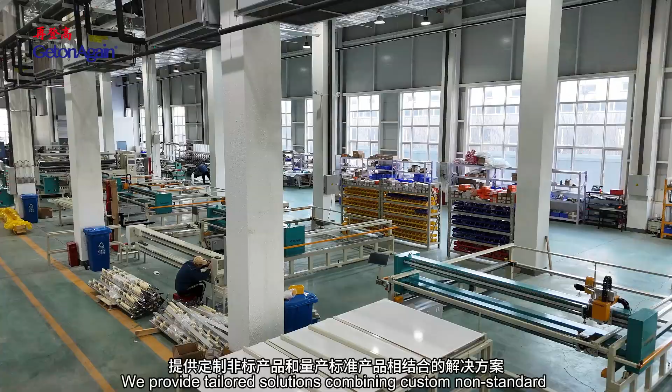We provide tailored solutions combining custom non-standard products with mass-produced standard products, including mechatronic machines, automated production lines, and intelligent factory solutions.

Pattern room equipment includes the magic inkjet plotter: 2 cartridge version with maximum printing speed of 110 square meters per hour, and 4 cartridge version with maximum printing speed of 200 square meters per hour.

Vertical inkjet cutting plotter, one machine with multiple functions: pattern drawing with cutting, or standalone drawing. High-quality rotary cutting knife can cut minimum 80 grams per square meter paper for sample design, cost saving.

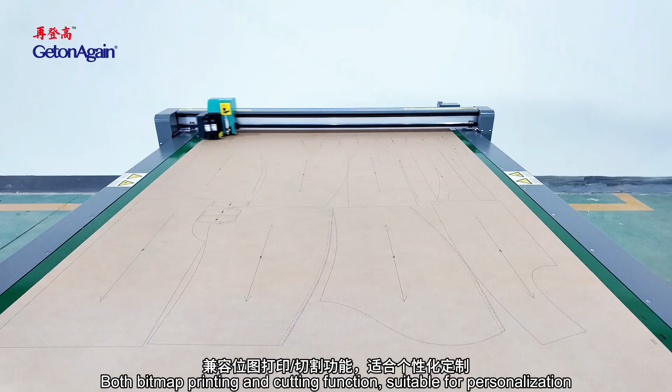Flatbed inkjet cutting plotter, both bitmap printing and cutting function, suitable for personalization, configured with long knife or short knife, and optional fixed knife sleeve or elastic knife sleeve, suitable for cutting various materials.

Digitizer, easily reading paper patterns, convenient positioning, simple operation, accurately reading patterns, enabling faster design. It is a powerful tool for traditional manual drawing digitization.

Digitizer can be used in various fields, such as clothing industry, fashion design, surveying and mapping, mining, stamping, and environmental protection, etc. Flatbed scanning digitizer.

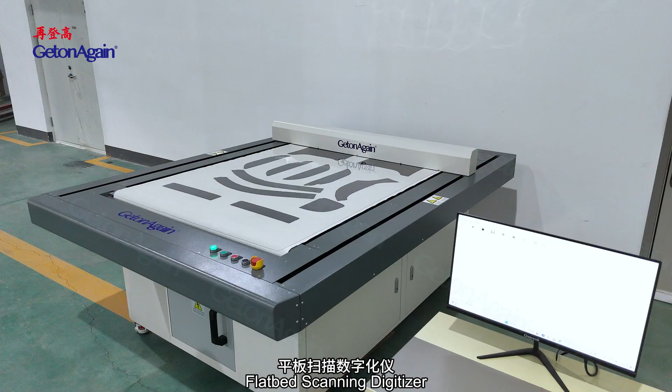One button to start after placing scanning pieces. Can vacuum adsorption auto scanning, auto transmission. According to different models, supports ultra-long width scanning. Scanning speed up to 7,200 mm per minute, scanning resolution 150 to 300 dpi. High definition panoramic 1:1 image ensures effective identification of various contours, notches, and inner holes.

Cutting equipment includes the automatic spreading machine. Easily set the spreading method, length, speed, quantity and sections, with intuitive as well as simple operation. Dual use for both knit and woven fabrics, suitable for t-shirts, children's clothing, loungewear, and toy textiles.

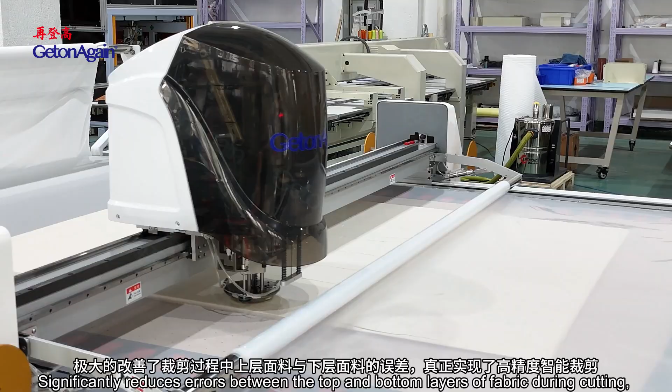Automatic multi-layer cutting machine. Through the combination of micron-level intelligent sensing components and an intelligent control system, dynamic compensation and correction of cutter deformation during cutting operations are achieved, significantly reducing errors between the top and bottom layers of fabric during cutting, enabling truly high-precision intelligent cutting.

Automatic single-layer cutting machine. No need to create specialized cutting molds. Cutting can be performed precisely by directly importing CAD design drawings into the equipment. Optimizes cutting paths, integrates repeated cutting lines, allows for pre-simulation of the cutting process, and supports continuous cutting for extra-long materials.

Stripe and plaid matching cutting machine, equipped with a few HD industrial cameras, according to the capture size to perform intelligent combination, ensuring high accuracy fabric image capturing.

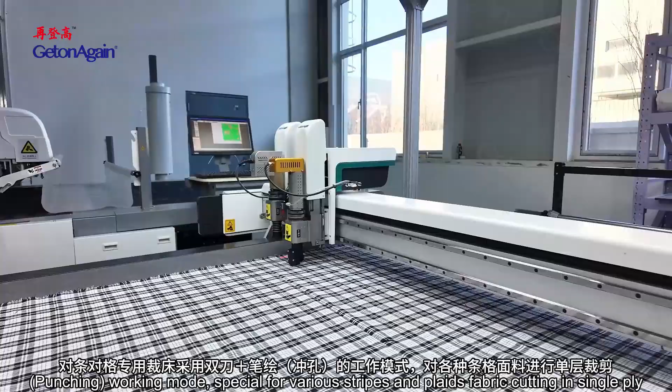Stripe and plaid matching auto cutter, equipped with double knives and pen draw punching working mode, special for various stripes and plaids fabric cutting in single ply.

High-end clothing customization: the effect of the alignment match stripe and plaid process has become an important measurement of the quality of this type of clothing. Stripe and plaid auto cutter is the equipment specially developed for this process to meet matching stripe and plaid clothing, suitable for single ply cutting.

Process of striped plaided fabrics. Precision single head cap and tubular embroidery machine. Pattern rotation and proportional scaling.

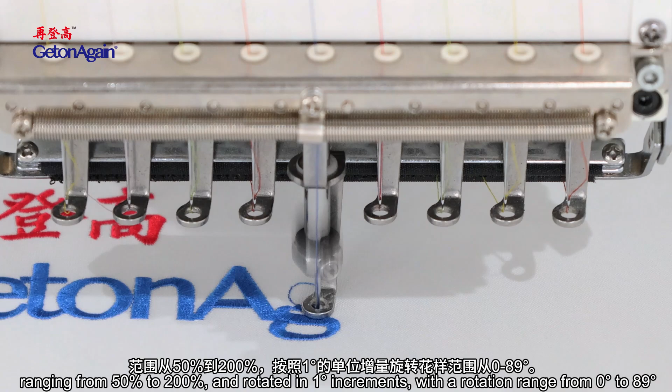Patterns can be scaled up or down in 1% increments, ranging from 50% to 200%, and rotated in 1 degree increments, with a rotation range from 0 degrees to 89 degrees.

Precision two-heads cap and tubular embroidery machine, equipped with automatic color changing, automatic thread trimming by motor, servo motor thread hooking, and automatic thread break detection.

6-head flat embroidery machine, used for high-end customization of clothing, bags, shoes, hats, toys, and other products.

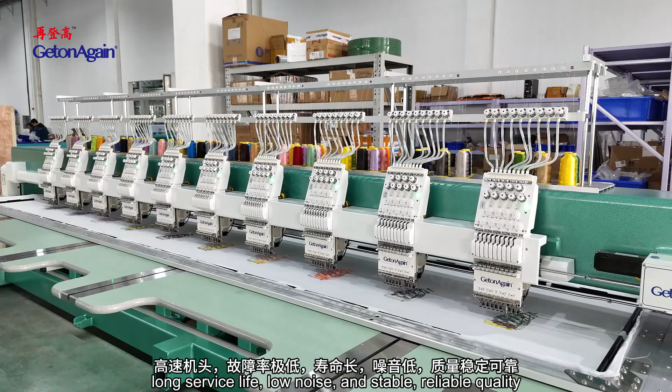Computerized embroidery machine. High-speed embroidery with extremely low failure rates, long service life, low noise, and stable, reliable quality. Equipped with an upper thread clamping device to prevent thread detachment and breakage, ensuring excellent embroidery results. Suitable for textile and garment manufacturing, footwear, hats, bags, home decoration, automotive interiors, and industrial products area.

Embroidery equipment includes the Cloud Smart Teaching Embroidery Machine, suitable for integrated theoretical and practical teaching of computer embroidery in fields such as fashion and apparel design, clothing design and its engineering. Mixed chenille chain stitch embroidery machine.

Mixed embroidery feature: according to color sequence settings, switchable between chenille embroidery and flat embroidery, simplified operation. Chenille needle height can be adjusted across 10 levels according to chenille pile height or chain stitch thread thickness. Multifunctional embroidery on garment, shoes, caps, home textile, toys, bags and luggage, art thread, etc.

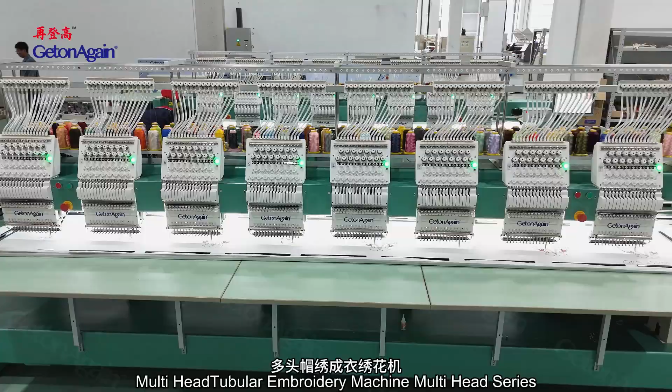Multi-head tubular embroidery machine, multi-head series, suitable for embroidering on flat, caps, garments, shoes, belts, bags, etc. Auto thread trimmers, auto color change, auto thread break detection, 270 degree wide angle cap system, red light locating, LED lighting, precise head and drive system to ensure exquisite embroidery work.

Drop tables, easy to lift up and down. Multiple heads greatly improve work efficiency, suitable for embroidery shops and factories of a certain scale.

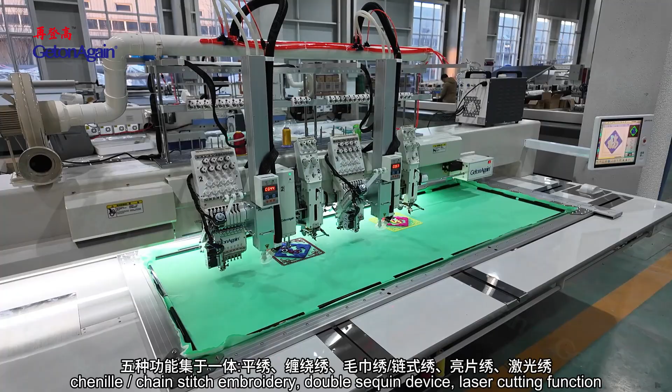Computerized 5-in-1 embroidery machine, integrating 5 functions in one machine: flat embroidery, coiling, tape cording embroidery, chenille and chain stitch embroidery, double sequin device, and laser cutting function. High precision, strong stereo sense, ideal artistic effect, suitable for embroidery of apparel, home textile, furniture, teaching, design and arts and crafts, etc.

Computerized mixed embroidery machine, multifunctional integration: flat embroidery, cording embroidery, chenille, chain stitch embroidery, sequin embroidery, and laser embroidery. Expandable options support additional modules such as laser process. Fast switching between flat embroidery, cording embroidery, or chenille embroidery, allowing you to choose any embroidery type as needed. Applications: suitable for embroidery on garments, home textiles, home decor, education areas, R&D, and arts and crafts products.

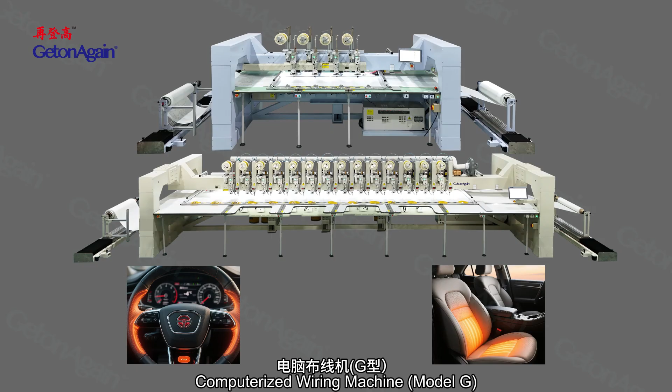Computerized wiring machine Model G. Gantry frame design ensures easy material loading, unloading, and maintains material flatness during wiring.

Large spool device reduces heating wire replacement frequency during production. Automatic wire feeding device for resistance wire or other wires, with adjustable feed amount and feed fault alarms.

Automatic product changeover. Raw fabric feeds in from one end. After wiring, automatic take-up device pulls material with adjustable length, reducing manual pulling time and labor.

Pneumatic frame with program-controlled pneumatic components for automatic opening, closing, and tensioning. Firm clamping with adjustable stretching lengths within a specified range.

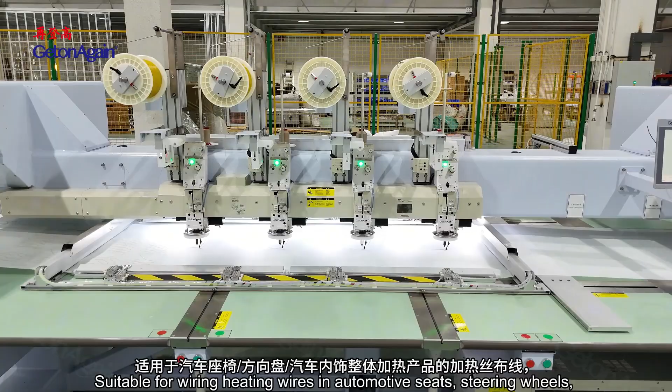Suitable for wiring heating wires in automotive seats, steering wheels, and complete interior heating products. Also applicable for automotive hands-off detection HOD product wiring.

Carbon fiber placement stitching machine. Suitable for the layup and stitching of carbon fiber materials in industries such as automotive, aerospace, and bicycle manufacturing. Enables precise features and independent feeding paths for carbon fiber, significantly reducing fiber abrasion and ensuring material integrity.

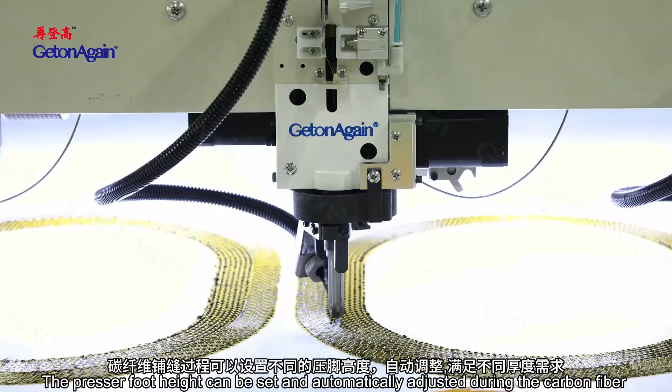Enables highly accurate stitching of carbon fiber fabrics. Stitch width can be set according to different material specifications. The presser foot height can be set and automatically adjusted during the carbon fiber placement and stitching process to accommodate different material thicknesses.

Tufting series equipment includes computerized tufting machines with a rotary tufting head at any angle, avoiding positive-negative stitching difference, with higher efficiency and better tufting result. Suitable for various rugs, carpets, hanging carpet, tapestry, and other flooring, decorative, and home furnishing products tufting.

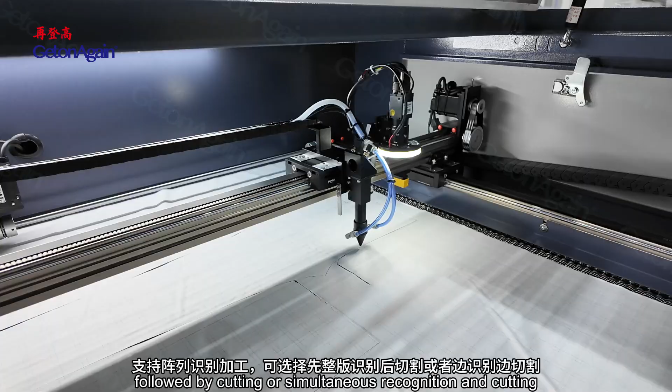Laser equipment includes small format camera positioning laser engraver cutting machine, supporting array recognition processing, with options for full sheet recognition followed by cutting or simultaneous recognition and cutting. Features multi-template mixed cutting, allowing the recognition and positioning of different patterns to be completed in a single operation.

Laser engraving and cutting machine. The cutting center can directly and seamlessly interface with software such as AutoCAD, CorelDRAW, AI, and Garment CAD, ensuring easy operation, high cutting precision, and fast cutting speed.

Suitable for clothing, home textiles, furniture, luggage, toys, car interiors, shoemaking, and other industries for cutting and carving of non-metallic materials.

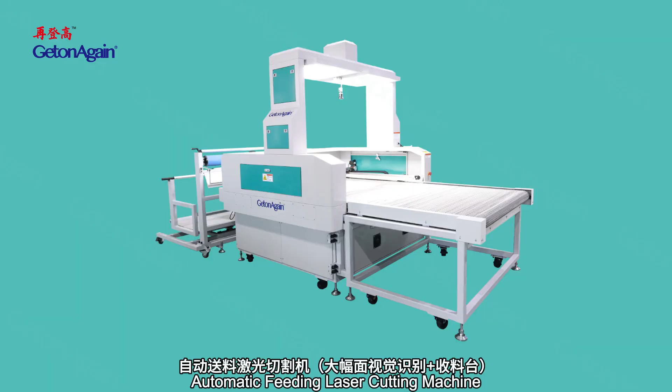Automatic feeding laser cutting machine, large format vision recognition plus auto receiving table. Advanced vision system with high resolution industrial camera captures real-time images of material patterns, accurately detecting outer contours to perform precise cuts, resolving issues such as distortion in printed or stretched fabrics.

Choose the most suitable positioning mode for different pattern types to optimize cutting accuracy and efficiency. Supports edge alignment and tension control to ensure smooth, wrinkle-free material feeding.

Highly automated, ideal for continuous production. Designed for precise, high-efficiency cutting of flexible materials such as digitally printed fabrics, lace with pattern alignment and shaping cutting, and heating elements with positioning requirements.

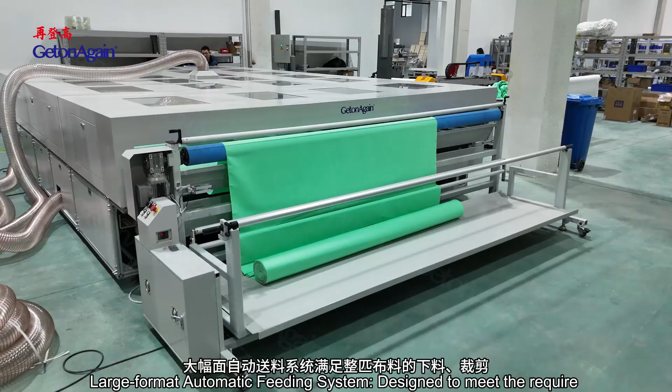Fully automatic large format laser cutting machine with inkjet device. Large format automatic feeding system designed to meet the requirements for feeding and cutting whole rolls of fabric. Inkjet and cutting functions integrated for enhanced versatility.

Applicable to industries such as custom clothing, single-piece cutting, sofas, toys, footwear and headwear, textile print pattern positioning cutting, automotive interiors, industrial filtration, and advertising, etc.

Sewing equipment includes automatic arbitrary rotary single-needle leather sewing machine, suitable for automated leather pattern sewing in the fields of automotive interiors, car seat covers, car door panels, airplane seats, and leather furniture upholstery.

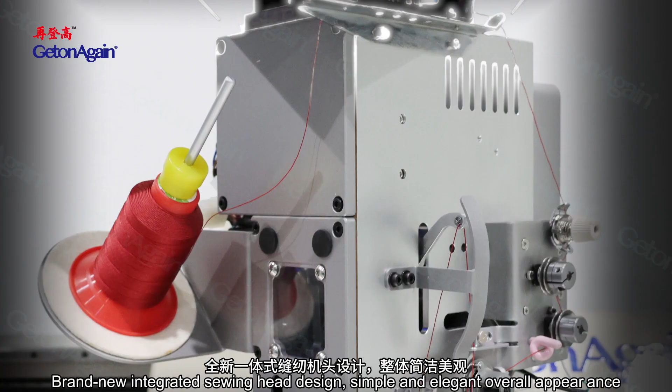Brand new integrated sewing head design, simple and elegant overall appearance, with a 15-inch HD industrial touch control screen. Two-size workbenches designed with a flexible mechanism, reducing size after folding for easier transportation.

Sewing head can rotate at any angle, avoiding differences between forward and reverse stitches, improving sewing efficiency and stitch quality. Pneumatic lifting head structure with a stroke of 50 mm, making frame changes and span sewing more convenient.

The advantage of an independently driven presser foot system lies in its ability to control presser foot height through real-time pattern programming, effectively addressing uneven presser foot pressure issues when sewing materials of varying thicknesses.

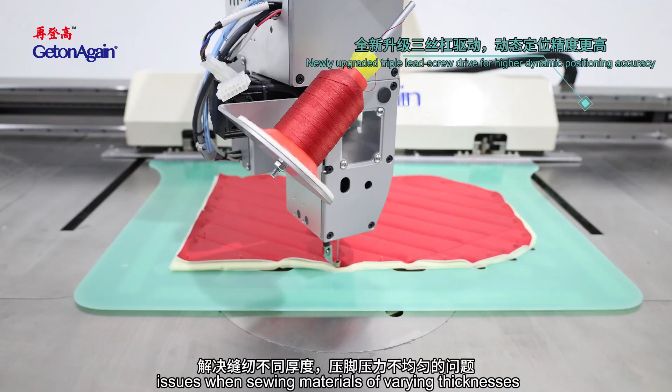Newly upgraded triple lead screw drive for higher dynamic positioning accuracy. Max speed reaches 2,500 stitches per minute.

Fully automatic 360 degrees template sewing machine with auto feeding. Ideal for automated sewing of thin and thick materials including quilted garments, down jackets, pillowcases, etc. Dual auto feeding system enhances efficiency and reduces operator fatigue.

Vertical head lift allows easy template replacement and convenient step-over sewing. Reinforced casting body ensures consistent stitches even at high speeds, with no head sinking.

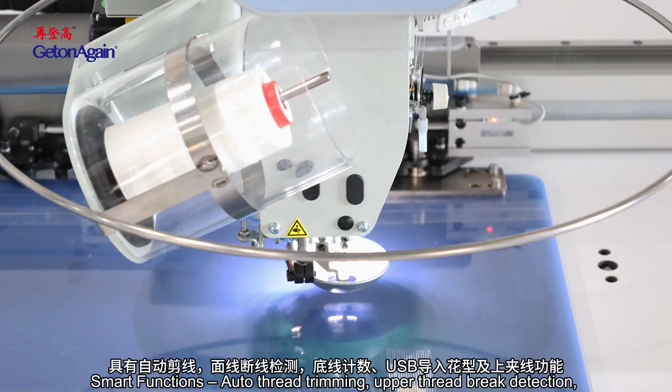Smart functions include auto thread trimming, upper thread break detection, bobbin counter, USB pattern import, and top thread clamping.

Fully automatic 360° double needle heavy-duty template sewing machine, for automotive seats, automotive airbags, automotive interiors, home furnishings, and other double thread heavy-duty sewing.

Features include automatic thread trimming, emergency stop, thread breakage detection, bobbin thread counting, data input saving, and automatic adjustment of sewing direction. Fully servo motor control ensures high equipment stability and guarantees high-quality sewing results.

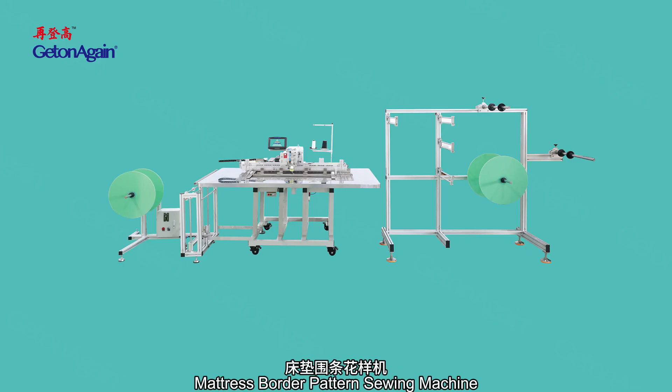Mattress border pattern sewing machine. Pneumatic presser frame securely holds fabric in place for more beautiful stitching and allows for wide-range horizontal frame movement.

Machine head with micro-oil head design ensures fabric remains free from all contamination during sewing. Pneumatic positioning device guarantees high-precision alignment at panel joints.

Features automatic thread trimming, automatic material collection, and machine error alarm for ease of operation. Standard configuration with feeding and collecting racks for streamlined workflow.

Advanced sewing technology for mattress side borders. Fully automatic perforation and sewing integrated machine.

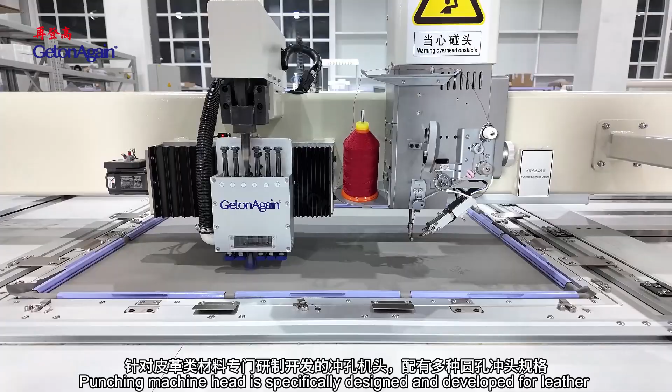Punching machine head is specifically designed and developed for leather materials, equipped with various round punching tools specifications. Sewing head up moving stroke is 50 mm, providing sufficient space for material loading and easy operation.

Suitable for perforation and sewing processes of various types and thicknesses of genuine leather and microfiber leather used in car seats, automotive interiors, aircraft seats, luggage, furniture, and more.

Fully automatic embroidery and sewing integrated machine. 9-color embroidery machine head to meet the embroidery needs of different industries.

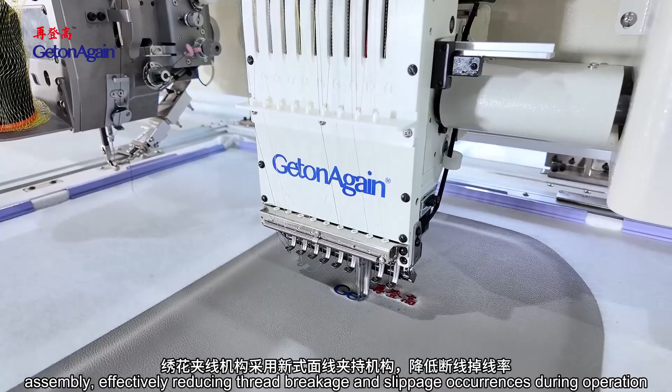The embroidery thread clamping mechanism incorporates a novel upper thread clamping assembly, effectively reducing thread breakage and slippage occurrences during operation. Specially designed sewing machine head for leather materials, producing beautiful stitching.

Presser foot height is motor controlled and highly adjustable. Sewing machine head has up-down moving stroke of 50 mm, providing ample space for material loading and ease of operation.

Suitable for various types and thicknesses of genuine leather and microfiber leather for automotive seats, car interiors, aviation seats, luggage, furniture, etc., combining embroidery and sewing processes.

Fully automatic perforation round hole, embroidery, and sewing rotating head machine. Integrates punching, embroidery, and sewing into one machine, allowing for arbitrary pattern design and seamless combinations of punching, embroidery, and sewing for complex processes.

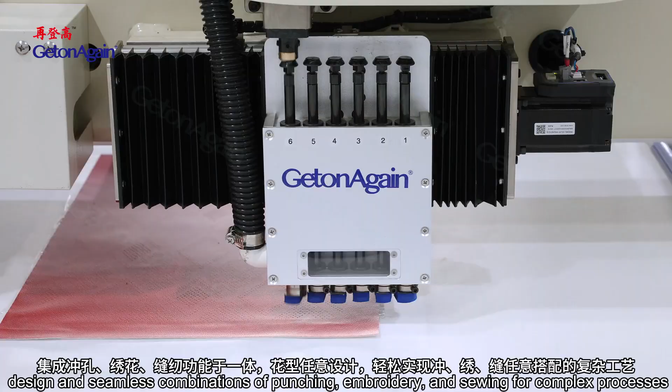The 9-color embroidery head meets the embroidery needs of various industries. Sewing machine head features an arbitrary rotation structure, creating beautiful stitching, reducing frame movement frequency, and improving efficiency.

Suitable for punching, embroidering, and sewing processes for various types and thicknesses of genuine leather and microfiber leather used in automotive seats, car interiors, aviation seats, luggage and furniture, etc.

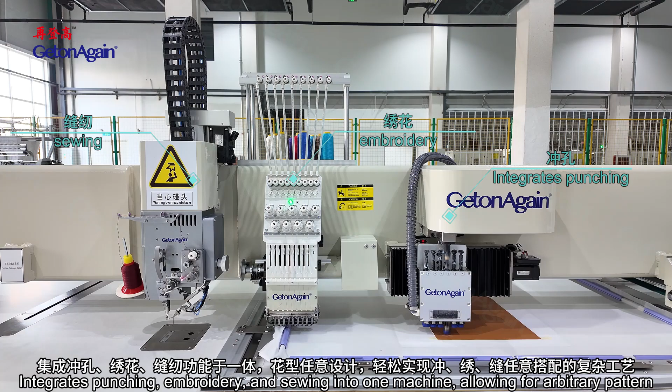Fully automatic round perforation and 9-color embroidery and fixed head sewing machine, Super M. Integrates punching, embroidery, and sewing into one machine, allowing for arbitrary pattern design and seamless combinations of punching, embroidery, and sewing for complex processes.

The 9-color embroidery head meets the embroidery needs of various industries. Sewing machine head features an arbitrary rotation structure, creating beautiful stitching, reducing frame movement frequency, and improving efficiency.

Suitable for punching, embroidering, and sewing processes for various types and thicknesses of genuine leather and microfiber leather used in automotive seats, car interiors, aviation seats, luggage and furniture, etc.

Fully automatic perforation special hole and embroidery and sewing rotating head machine. Integrates punching, embroidery, and sewing into one machine, allowing for arbitrary pattern design and seamless combinations of punching, embroidery, and sewing for complex processes.

Specially developed punching machine head for leather materials. The 9-color embroidery head meets the embroidery needs of various industries.

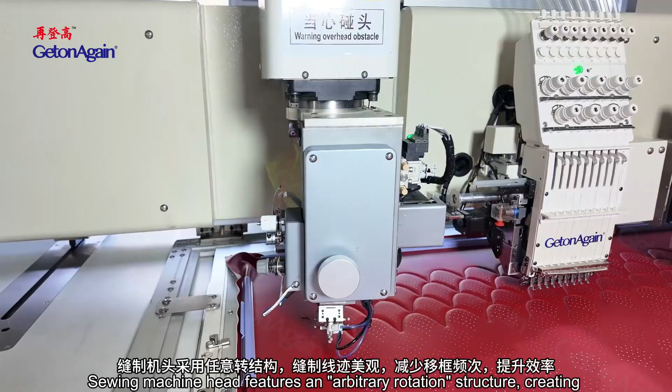Sewing machine head features an arbitrary rotation structure, creating beautiful stitching, reducing frame movement frequency, and improving efficiency. Suitable for punching, embroidering, and sewing processes for various types and thicknesses of genuine leather and microfiber leather used

in automotive seats, car interiors, aviation seats, luggage and furniture, etc.

Automatic high-speed leather perforating machine for punching processing of leather or microfiber leather with various types and different thicknesses, such as car seats, aviation seats, shoes, bags and furniture, etc.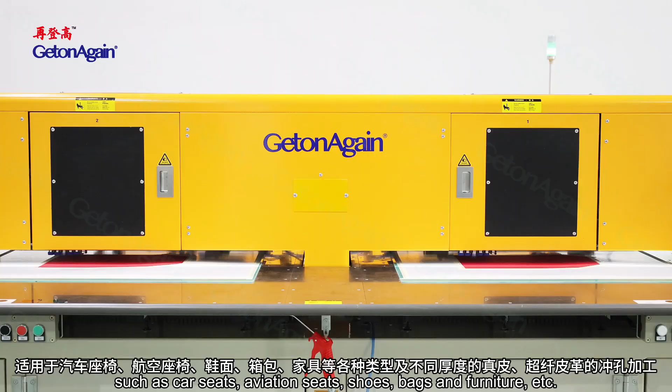Full-scale, 3-dimensional protective design ensures safer operation. The punch toolbox is heightened to prolong the punch tool's spring's service life and reduce part wear.

The XY axis uses a ball screw direct drive for high-precision punching. The surface of key punching parts is strengthened to resist impact and fatigue, meeting the needs of high-intensity work.

Single head machines can make up to 2000 holes per minute, and double head ones up to 4000.

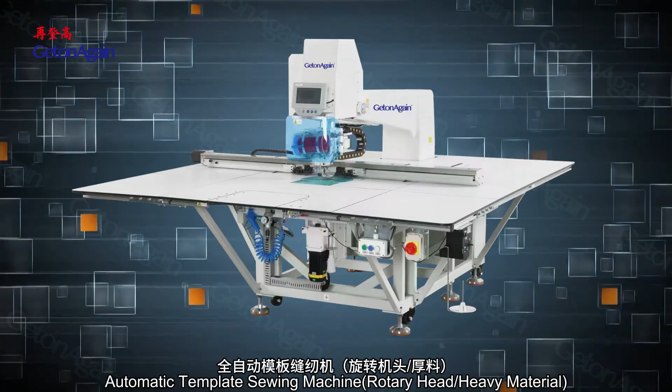Automatic template sewing machine, rotary head, heavy material. Both the X and the Y axis use a screw and slide transmission method, providing high precision and good stability.

Suitable for pattern sewing on leather and heavy materials, such as car seats, sofas, massage chairs, boat interiors, and aircraft seats. The machine head can rotate freely to ensure the quality of the sewing stitches.

Automatic template sewing machine. Double belt, double guide rail, double stepper motor structure. The machine head adopts oil-free lubrication, and the rotary shuttle adopts oil-line lubrication technology to completely eliminate fabric pollution.

Identify patterns through RFID barcodes and automatically switch to the corresponding sewing program for quick sewing. Used for template sewing processes such as opening pockets, notches, bag covers, collar trimming, etc.

Pattern sewing machine. This machine can easily sew 1200D thick thread with a thickness of 12 mm, 2 times large rotary hook, automatic thread trimming, and the maximum sewing speed can reach 2500 RPM.

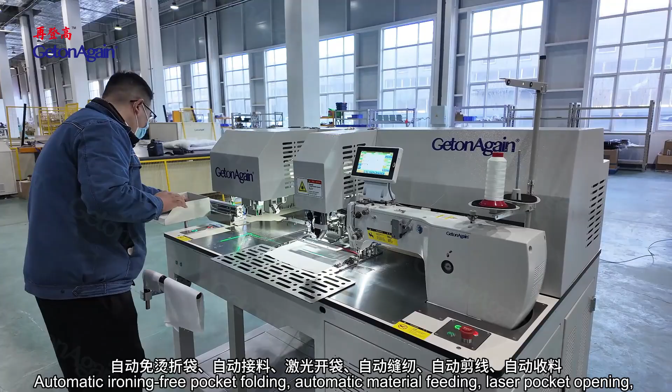Automatic laser pocket opening machine. Automatic ironing-free pocket folding, automatic material feeding, laser pocket opening, automatic sewing, automatic thread trimming, and automatic material collection.

Suitable for front and back pockets for men's and women's clothing, suits, inner and outer pockets of jackets, dress pants, hoodies, sun protection clothing, school uniforms, sportswear, cotton padded jackets, down jackets, workwear, jackets, uniforms, trench coats, cashmere coats, and plackets for polo shirts.

Quilt edge binding machine. Features single needle compound feed, achieving cutting, binding, and sewing in one seamless operation. Enlarged right side waste discharge port with pneumatic waste discharge assistance ensures smoother disposal of waste generated during edge cutting.

Special synchronized feeding structure, including alternating presser foot, needle, feed dog, and binding attachment, ensures no wrinkles or misalignment during straight line or corner sewing for a flawless binding effect.

Designed for edge binding processes of quilts such as cotton quilts, summer quilts, spring and autumn quilts, and other bedding items. Quilt and mattress binding with pulling sewing workstation.

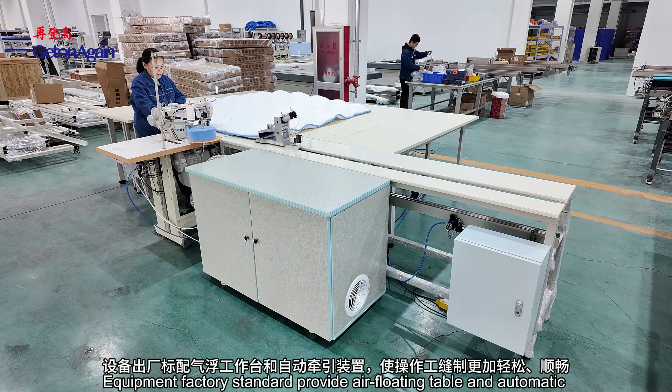Equipment factory standard provides air floating table and automatic pulling device, making sewing worker operation easier and smoother. Equipped with PLC control pulling device synchronized with sewing machine electronic control, these two machines work at the same speed and synchronize direction.

Optional automatic storage and vacuuming device to improve efficiency, reduce dust emissions, and provide the sewing operator a clean and tidy working environment. Binding result is rich and strong with a solid feel, corners are smooth and nice, evenly stitched length, no hairy edge, no edge folding, and no corner raising effect or other negative symptoms.

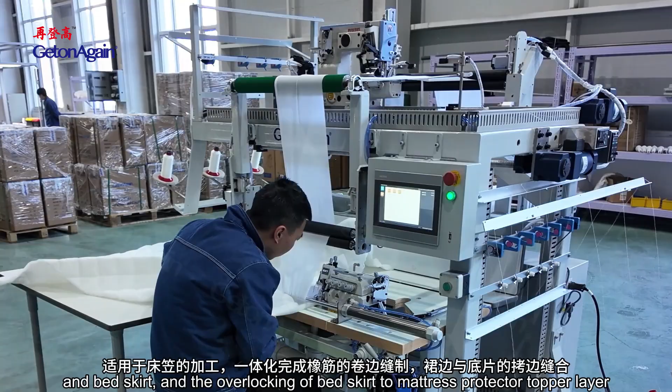Automatic mattress protector skirting sewing machine, interlock and overlock. Suitable for processing fitted sheets, all-in-one to finish binding stitching of elastic rope cord and bed skirt, and the overlocking of bed skirt to mattress protector topper layer.

Multi-hole bar tacking machine, press arm and sewing frame work synchronously, ensuring high precision bar tacking. Suitable for chair pads, cushions and pillows with fillings, and bar tacking requirements for reinforcing sewing work.

Long arm label sewing machine, adopts connecting rod thread pickup, large rotary hook, needle bar swinging up and down with simultaneous feeding, forming zigzag lock stitch. Reasonable swing mechanism makes switching between zigzag sewing and normal lock stitch easy and free. Upper and lower synchronous feeding structure makes it easy to operate, with good sewing effect and beautiful stitches.

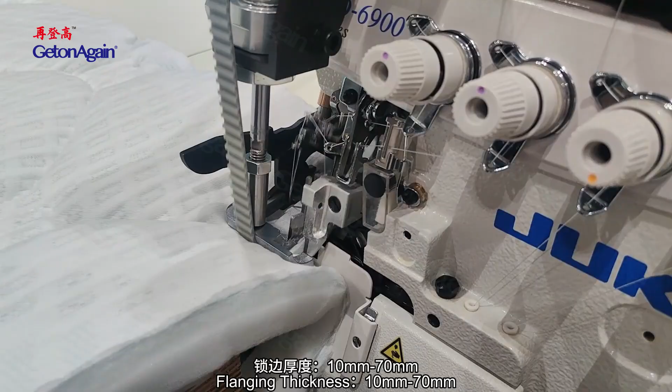Mattress flanging machine, equipped with a Juki machine head from Japan and a double bar twin needle design, easily switches between thick and thin fabric sewing. Flanging thickness 10 mm to 70 mm, max speed 3000 RPM, flanging width 25 mm.

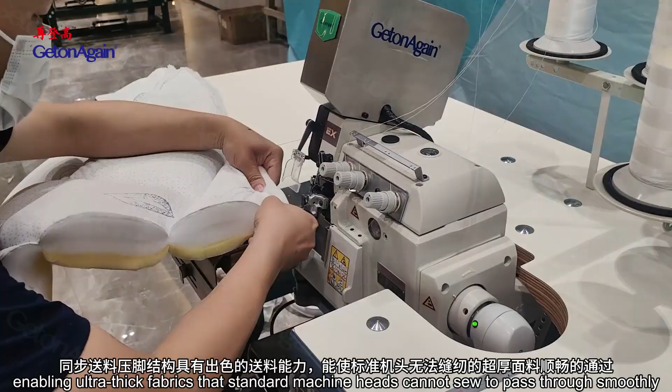High-speed mattress flanging machine. Effortless switching between thick and thin fabric sewing. Synchronized feeding presser foot structure provides excellent feeding capability, enabling ultra-thick fabrics that standard machine heads cannot sew to pass through smoothly. Flanging thickness 10 to 90 mm.

Automatic lubrication and cooling system for the synchronized feeding structure. Max speed 4000 RPM. Flanging width 15 mm, 25 mm, 30 mm.

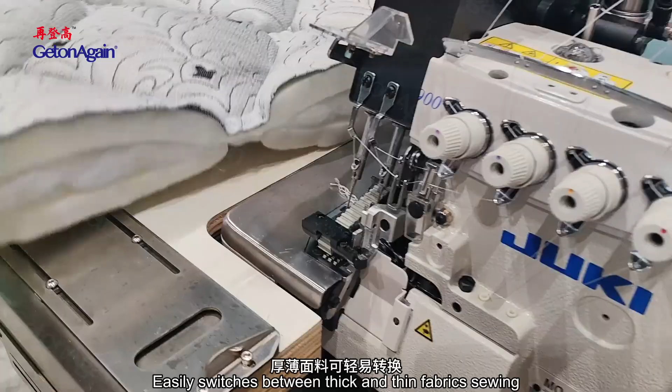Heavy-duty mattress flanging machine. Innovative drive mechanism ensures more convenient and powerful sewing performance. Adjustable stitch length of 4.5 to 6 stitches per inch, easily switches between thick and thin fabric sewing. Capable of overlocking extra thick mattress fabrics ranging from 10 mm to 90 mm. Maximum sewing speed reaches up to 4500 stitches per minute. Overlocking width is 25 mm.

Computerized synchronized hot cutting binding machine. Designed for products requiring binding processes, it is equipped with a standard pneumatic hot cutter. The binding tape no longer requires manual cutting; simply press a button to complete precise cutting. The hot cutting edges are clean, with no fraying or loose threads, significantly improving production efficiency.

Mattress handle stitching machine. Fully automatic operation, controlled via touch screen. Customized stitching patterns are possible, significantly improving production efficiency. Easy to operate, with precise positioning.

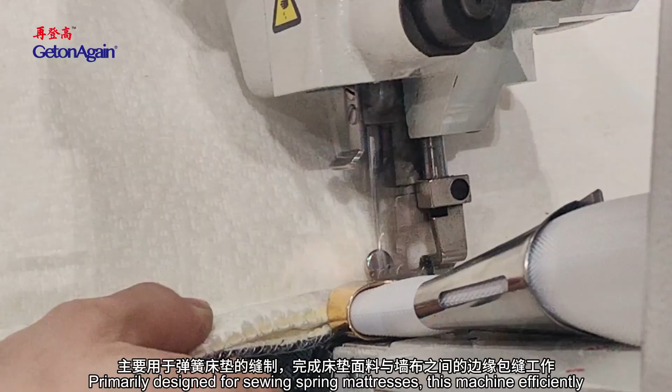Semi-automatic mattress tape edge machine. Primarily designed for sewing spring mattresses, this machine efficiently completes edge overlocking between mattress fabric and sidewall fabric. It is also suitable for sewing other types of mattresses and sofa cushions. Key features include an electrically adjustable work table with high strength, independent support, ensuring exceptional stability during operation.

Intelligent tabletop overlock flanging machine. Equipped with a modified Juki thick material overlock machine head. Newly designed ultra-high lifting presser foot with a lifting height of 35 mm. Machine head can move, making threading and daily cleaning more convenient. Flanging thickness 10 mm to 80 mm, easily switches between thick and thin fabric sewing.

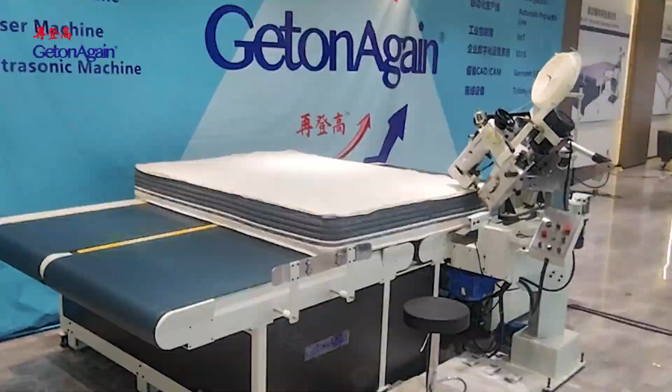Auto flip tape edge machine. Automated transfer table and mattress turnover arm enable the operator to work in one position without moving around. Variable speed drive automatically slows down on turning corners. The machine head can rotate freely to ensure the quality of the sewing stitches. When ready to sew the opposite side, the turnover arm unit flips the mattress automatically. Machine head height and inclination are adjustable.

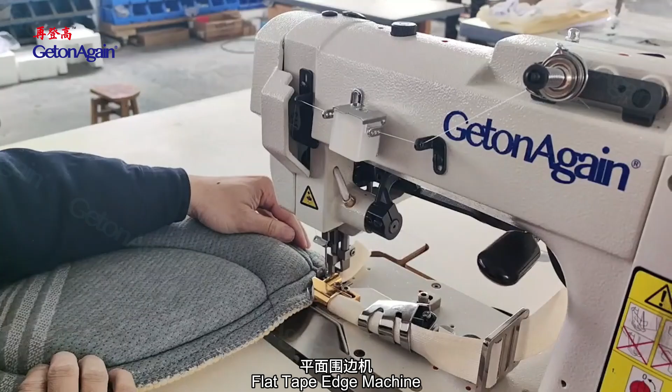Industrial sewing machines include various overlock and lock stitch machines. The flat tape edge machine is mainly used for stitching between mattress fabric and side border, suitable for sewing other soft mattresses, bedding, sleeping bags, and tents. It offers stable performance, little vibration, low noise, and high efficiency.

Long arm repairing machine is mainly used for the applique work of mattress crepe fabric. The upper and lower shafts of the machine are of integral structure, using a Taiwan servo motor to automatically position the needle. The new presser foot is equipped with a needle bar lifting device to make thick fabric completion more convenient and beautiful.

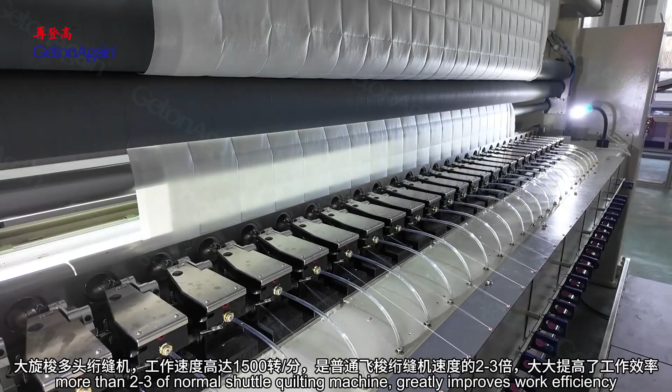Quilting equipment includes the computerized multi-head rotary hook quilting machine model and double row lock stitch multi-head quilter with large rotary hook. Max speed of 1,500 RPM, more than 2 to 3 times that of a normal shuttle quilting machine, greatly improving work efficiency. 3-fold capacity rotary hook means less bobbin changing frequency, with beautiful stitches, no lost stitch, and no thread loops.

Computerized multi-head rotary hook quilting machine model E features a 5-time jumbo rotary hook, less bobbin changing frequency, beautiful stitches, no lost stitch, and no thread loops. The interval between upper and lower needle bars can be adjusted to any value from 3 to 9 inches. The lower needle bar can move half a needle pitch in the X direction, so quilting needle bars of different sizes and patterns can be combined, especially for non-standard size patterns, achieving a unique effect.

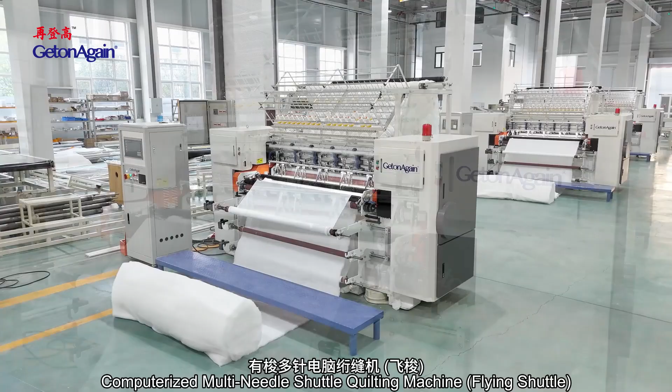Computerized multi-needle shuttle quilting machine with flying shuttle, for quilting of fitted sheets, bed covers, summer quilts, and clothing products with quilting patterns.

Computerized multi-needle chain stitch quilting machine. Servo motor-driven rollers and lead screws ensure precise quilting patterns, suitable for mattresses, mattress covers, sofas, bedding, home textiles, and home decor. Computerized single-needle quilting machine with lifting head.

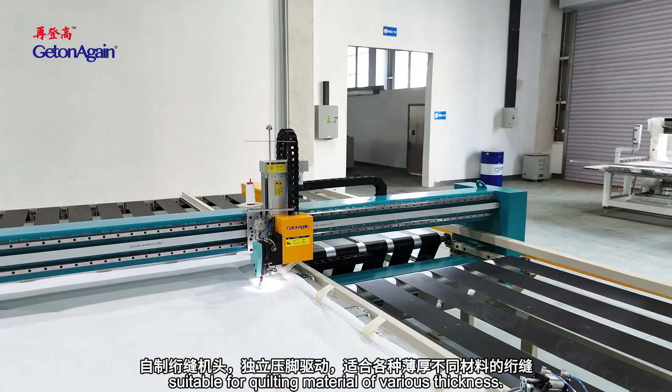Computerized single-head quilting machine, frame type belt support. High precision process stand ensures stable needle and hook clearance and longer service lifetime of rotary hook. Extendable quilting frame allows the desirable size of quilting to be adjusted freely. The specially designed quilting head has a presser foot with individual driving, suitable for quilting material of various thickness, with full servo motor control providing powerful and accurate driving force, greatly improving quilting precision.

Automatic thread broken detection function: the machine will stop after the thread breaks. Optional automatic bobbin changer is suitable for large area quilting and high-quality pattern products, such as furniture upholstery, sofas, headboards, soft beds, conference enclosures, or products with heavier materials such as gravity quilts, etc.

Continuous feeding gantry type single needle quilting machine, suitable for single-needle automatic quilting of mattresses, duvets, blankets, mattress protectors, upholstered furniture, and similar products. Fully automated workflow with automatic feeding, material pulling, quilting, and cutting, all completed in one integrated process.

Continuous feeding gantry type single-needle quilting machine, double saddle model. Double saddle frame design allows simultaneous quilting of 2 pieces, doubling quilting efficiency. Specially designed lift type quilting head with a lifting height up to 150 mm, suitable for quilting materials of various thicknesses, with maximum speed of 3,000 revolutions per minute.

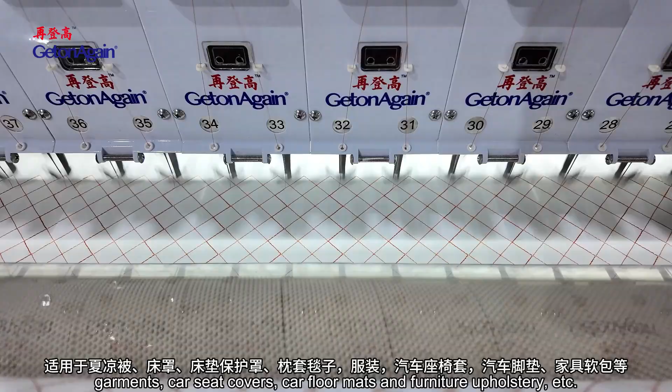Computerized single color single row quilting and embroidery machine model A, used for summer quilts, bedspreads, mattress protectors, pillowcases, blankets, garments, car seat covers, car floor mats, and furniture upholstery, etc. Equipped with a new high-speed double needle quilting and embroidery machine head with surface coating treatment for parts. Maximum speed 1000 rpm, recommended operating speed 750 to 850 rpm.

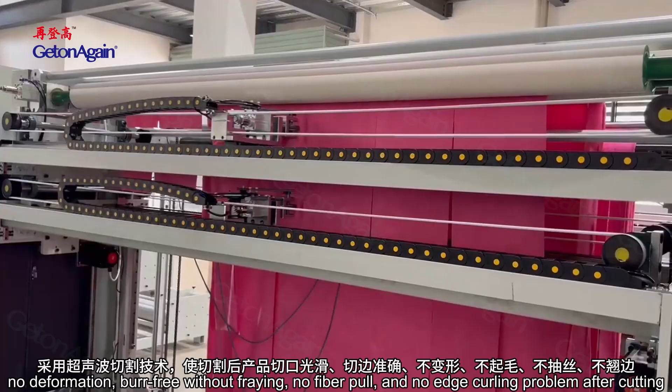Ultrasonic equipment includes the ultrasonic slitting machine. It adopts ultrasonic cutting technology ensuring smooth cutting edges, precision edge cutting, no deformation, no fraying, no fiber pull, and no edge curling problem after cutting. Cutting rollers and patterns can be customized to meet various needs.

Automatic ultrasonic quilting machine integrates ultrasonic sewing and ultrasonic edge sealing and cutting automation into one, completing the process in a single step. The latest structure design with interleaved transducers ensures embossing is seamless and non-wrinkled. After quilting, it can be connected with a cutting machine for the finished product, or connected with a rewinding device for fabric rolls.

The ultrasonic quilting machine can bond multiple layers of polyester fabric, non-woven fabric, polyester wadding, or artificial leather, etc., and emboss different patterns on it. Patterns are clear and beautiful, and the fabric doesn't deform, with strong bonding and high efficiency.

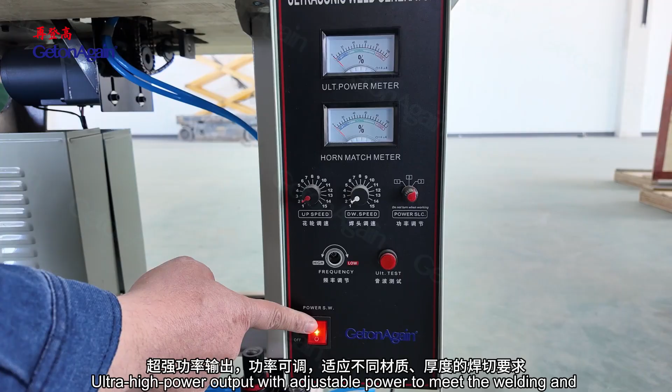Ultrasonic lace machine offers ultra-high power output with adjustable power to meet the welding and cutting requirements of different materials and thicknesses. Mold size is 23 to 60 mm, with a mold lifting system offering options for manual or pneumatic operation. It provides simultaneous single or multi-strip cutting with edge melting treatment for clean, burr-free edges. Pattern molds and welding heads undergo special hardness treatment for higher wear resistance, and various patterns can be customized as needed.

Cut work lace cuts various patterned holes with edge melting treatment. High running speed and simple operation. Bonding seamlessly fuses two or more layers of fabric together without thread or needles, ensuring strong welding strength, for forming, cutting, bonding, and embossing, which reduces forming steps.

Edge cutting for straight or curved single edge cutting with edge melting treatment ensures smooth, neat, and burr-free edges. Suitable for lace, decorative ribbons, home textile products, umbrella lace, tablecloths, automotive interiors, non-woven shopping bags, carbon bags, eyeglass cloth, etc.

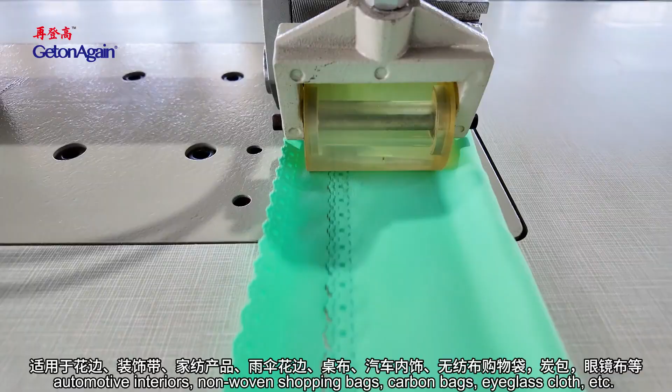Visual recognition and inspection equipment includes cut piece visual inspection instruments. After manual placement, one-click start allows for automatic scanning, automatic inspection of cut pieces, and automatic data storage. Scanning speed can reach up to 120 mm per second, with no need for additional lighting, ensuring reliable use in all weather conditions. Scanning resolution is 150 to 300 dpi, and the high-definition panoramic 1:1 image ensures that the inner-outer contours of the cut pieces are clearly visible.

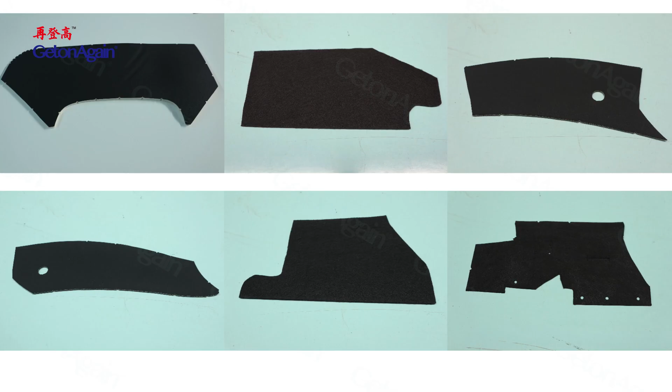Automated production line series includes multi-needle quilting machine, flying shuttle and cutting machine, and 4-side tape binding machine production line. Multi-needle quilting machine: the raw materials are quilted and fixed with lock stitches, mainly used to process quilt cores and cushions. Cutting machine: cuts the quilted semi-finished materials, including trimming, fixed length cutting, slitting and rolling, and other functions.

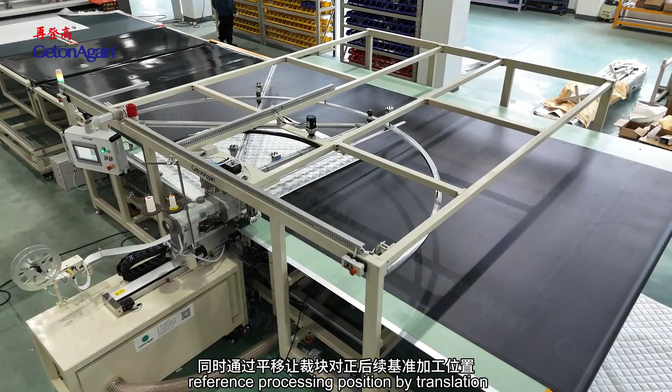Alignment platform: material transfer alignment mechanism. The cutting block waits to enter the next sequence on this platform, and at the same time, the cutting block is aligned with the subsequent reference processing position by translation. Automatic tape binding machine: the cutting piece is processed by the tape binding machine to make the edge of the cut piece beautiful, with a machine rounded corner tape binding process. The cutting and tape binding are integrated, and all actions are completed automatically.

Computerized multi-head rotary hook quilting machine and 4-side edge sewing machine, capable of quilting patterns in various sizes without changing needle positions, greatly enhancing operational efficiency. Double row machine with lower needles row can move half of the head distance in the X direction, creating combination patterns of different sizes when coordinated with the upper needles.

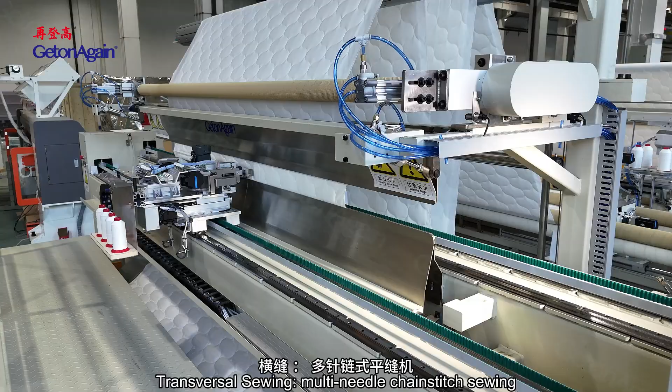Longitudinal sewing uses double chain stitch, with optional lock stitch or overlock stitch. Transversal sewing uses multi-needle chain stitch sewing. Transversal cutting between the 4 stitches cuts as per set length and feeds to the next sequence.

Automatic blanket straight corner binding machine, capable of holding 2 rolls of non-elastic fabric, equipped with edge alignment function, automatically pulls and cuts into panels. Pulling lengths can be set freely. 4-side tape binding sewing process for inelastic blankets.

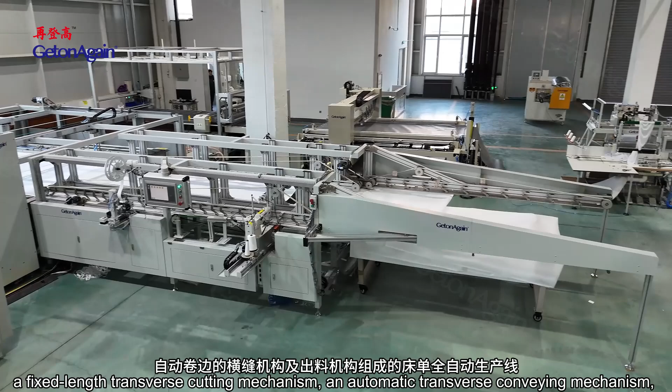Automatic bed sheet production line. A fully automated bed sheet production line composed of a feeding mechanism, an adjustable width longitudinal sewing mechanism, a fixed length transverse cutting mechanism, an automatic transverse conveying mechanism, an automatic hemming transverse seam mechanism, and a discharging mechanism.

Automatic bed sheet two side hemming machine. Suitable for continuous double-sided hemming and cutting of fabrics in home textile products manufacturing, such as bed sheets, flat sheets, and curtains. Supports both rolled and flat fabric feeding methods. Standard features include material shortage detection, automatic edge correction, and edge trimming. Equipped with dedicated hemming tooling, adjustable hemming size from 12mm to 100mm.

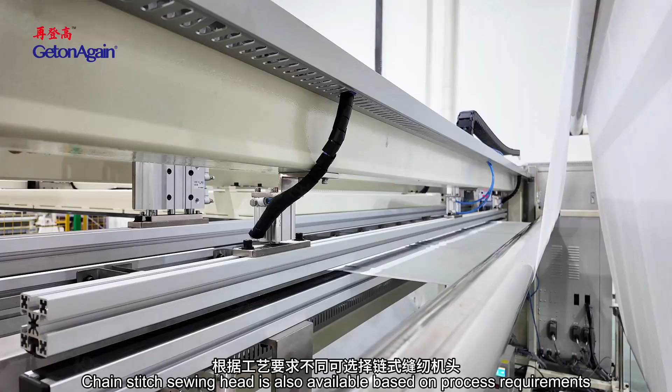Comprises a movable longitudinal sewing head with lock stitch optional. Automatic bobbin changer available, and hemming attachments. Chain stitch sewing head is also available based on process requirements. Rotary blade mechanism for automatic fabric cutting. Optional ultrasonic edge sealing is available. Automatically pulls out fabric to the preset length. After stacking the preset quantity of bed sheets, the machine conveys them laterally for discharge.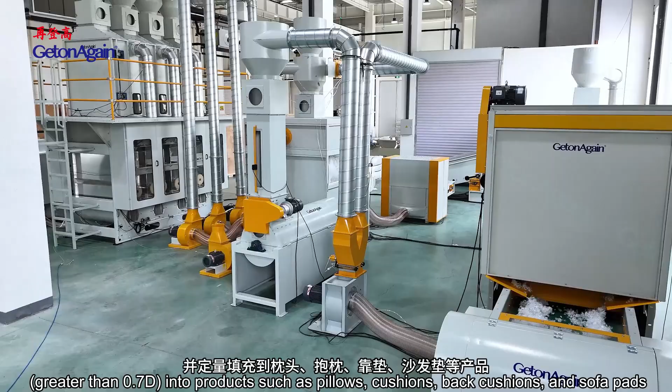Automatic vacuum kilo filling production line. This production line is suitable for loosening and weighing filling polyester short fiber raw materials, greater than 0.7D, into products such as pillows, cushions, back cushions, and sofa pads. Fully automatic one-button start, precise weighing filling, simple operation, and uniform filling. PLC program control, automatic cotton feeding, negative pressure cotton filling, and automatic clamping tools for bagging.

Raw fiber panel cutting case filling line. Edge trimming, length counting, cutting for polyfiber, thermal bonded wadding, chemical bonded wadding. Machine feature: unpowered material loader can pass bonded wadding to the panel cutter machine, equipped with bearings at the ends of each roller. Labor saving and energy saving.

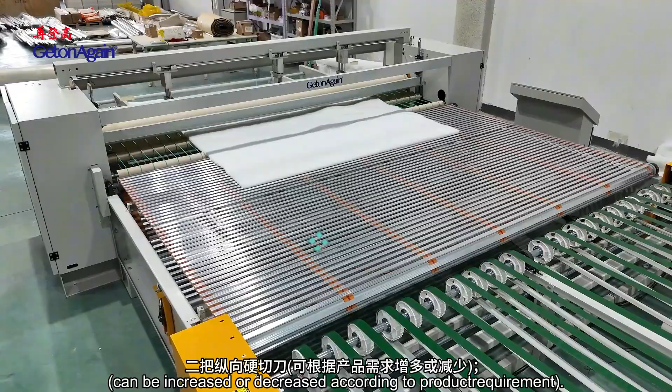Electric flyover automatic cross cutting. Two sets of longitudinally hard cutting blades can be increased or decreased according to product requirement. Automatically feeding the wadding fibers into the comforter envelope case after cutting off. Length set is controlled by computer and could be set to any value according to requirement.

Automatic sewing machine towel cross sewing machine. Intelligent control, one touch start, one operator can control multiple units, reducing labor intensity. Automatic fabric alignment, equipped with a feeding and alignment mechanism to effectively correct fabric skew and ensure precise positioning. Rear sweeping and pressing device ensures towels are laid flat and fixed in position for stacking or subsequent processing.

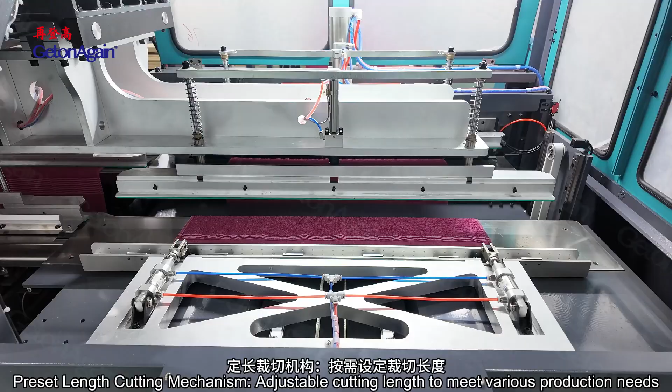Preset length cutting mechanism with adjustable cutting lengths to meet various production needs. Edge folding mechanism performs precise edge folding on both sides of the towel. Automatic labeling supports both single and folded labels with automatic feeding and code cutting. Equipped with towel detection, automatically detecting towels woven with suitable length, the joint seams between towels, etc. All those can be detected.

Sewing mechanism with international brand sewing head ensures beautiful and consistent stitching. Edge folding and sewing of unfinished and non-elastic towels.

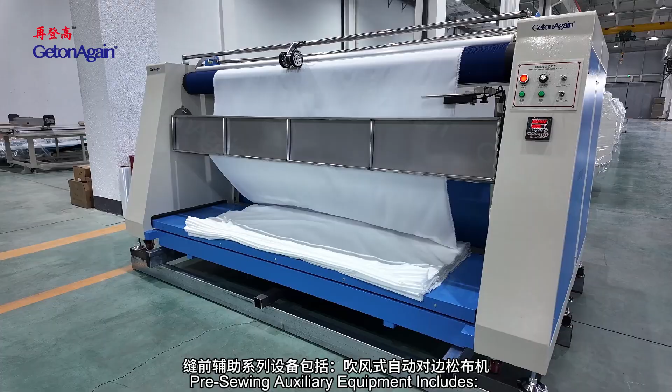Pre-sewing auxiliary equipment includes automatic edge alignment, a relaxing machine with air blowing, and roll fabric mounted and folded in a flat fold state. To achieve tension-free fabric placing, a wave-type air blowing device is used. In the loosening fabric process, fabric is relaxed by the blowing device.

Automatic marking machine with one-click start and intelligent grabbing allows one person to operate 4 to 5 machines at the same time, reducing labor costs. Features include automatic number adjustment, automatic counting, wrinkleless flipping, continuous numbering, and accurate, clear positioning. Used for cutting pieces for jeans, shirts, workwear, and down garments, etc.

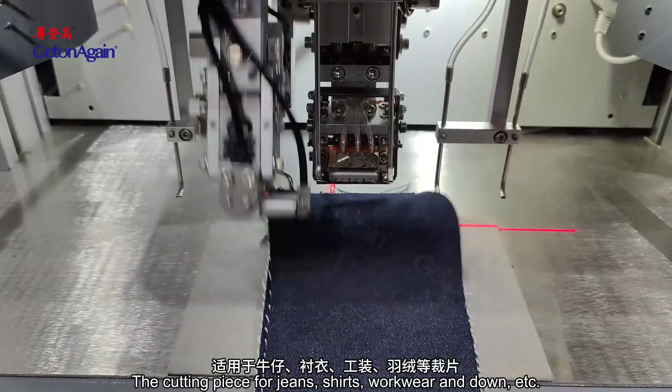High-frequency machine with built-in stepless heating system, adjustable temperature from 0 to 300, providing auxiliary heating to shorten processing time. Spark suppressor instantly cuts off current during sparking to prevent damage to molds and materials. Automatic overcurrent protection device protects electronic tubes and molds, extending their service life.

Used for embossing and stamping car and motorcycle foot mats, blister packaging, plastic heat sealing, and leather embossing.

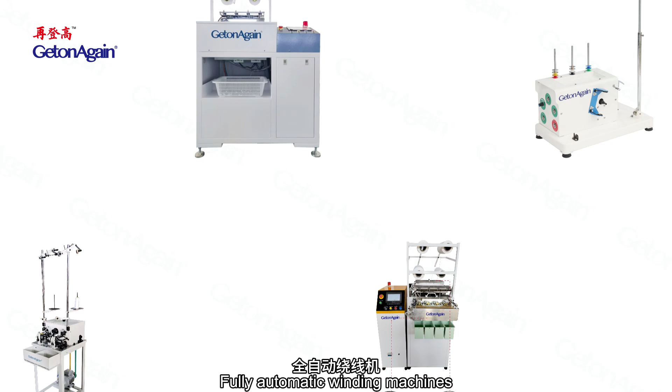Fully automatic winding machines. Post-finishing equipment includes the automatic folding and packaging machine, mainly composed of a folding device, rolling device, and stacking and compress plus conveyor device. Folding device: after the quilt is detected and transported to the designated position by sensors, a robotic arm folds the quilt into a strip shape.

After being detected by sensors, the strip-shaped quilt is transported to the designated position and folded into a block shape by a robotic arm. Rolling device: the strip-shaped quilt is transported to the automatic rolling device to complete the rolling process.

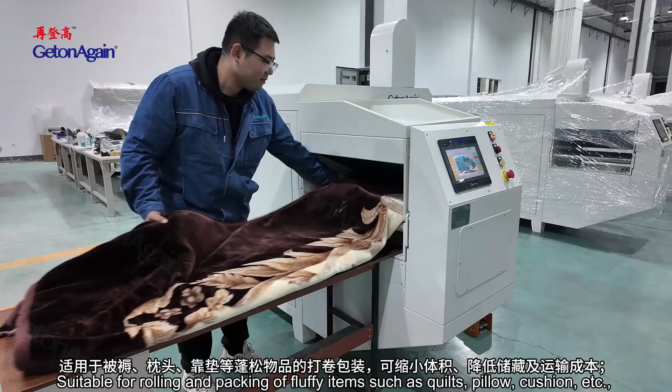Quilt roll packing machine, suitable for rolling and packing fluffy items such as quilts, pillows, and cushions, to reduce the volume and storage, as well as lower transportation cost. The packing item is auto-fed from backward to forward by the belt during the compressing process and rolled to pack into the bag.

Double cylinders, double operation, optional models. Double cylinders for double sealing, single cylinder for single sealing; the double cylinder design increases compression pressure and area. Double seal design allows two workers to operate two products at the side of the machine, greatly improving work efficiency, suitable for compressed packing of pillows, cushions, bedding, plush toys, and other products.

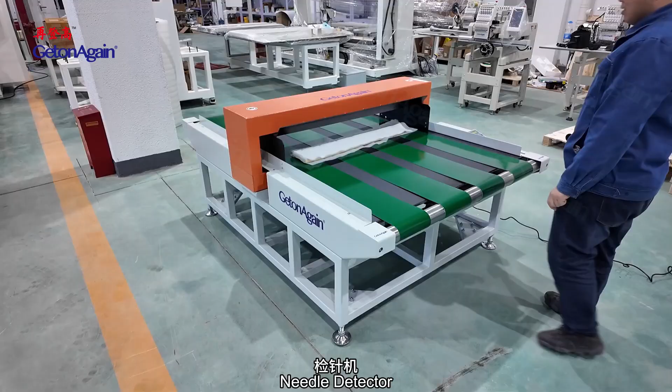Needle detector, applicable for large bulky products with ferromagnetic metal detection, for example bedding, etc. Working width can be adjusted between 1,200 to 4,000 mm according to customer setting.

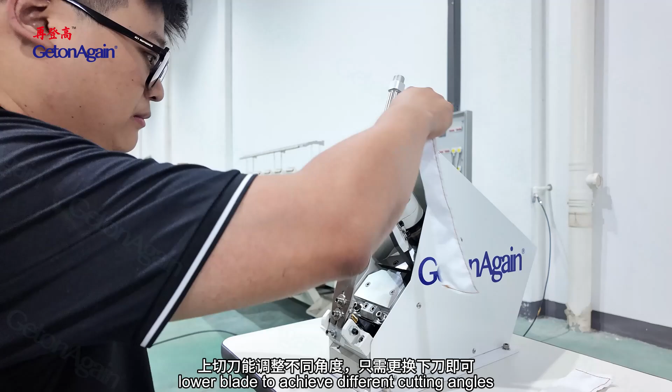Collar corner trimming and turning machine efficiently trims excess seam allowance from collar corners. Upper cutting blade angle is adjustable; simply change the lower blade to achieve different cutting angles. Equipped with a waste collection system for trimmed fabric edges. Pneumatically operated for superior collar turning results, ideal for shirt collar turning processes.

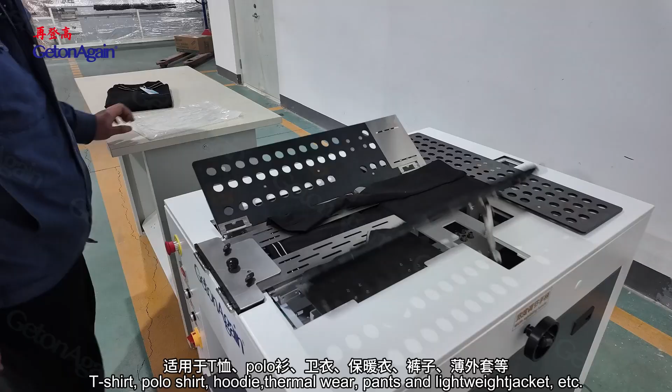Single and dual head cap pressing machine for baseball caps. Steam time, cap clamping time, steam output, and air consumption can all be automatically adjusted. Built-in steam generator eliminates the need for an external boiler, with automatic water supply, suitable for bulk order production needs. Using a robotic arm, it can automatically grip the cap; simply place the cap on the mold to complete the pressing process.

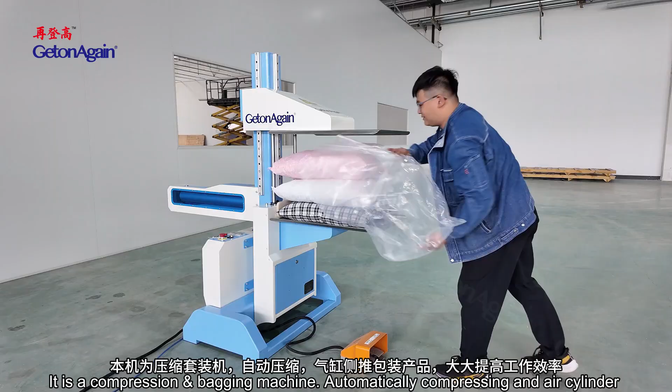Compression bagging machine automatically compresses via air cylinder, side pushing the product for bag packing, greatly improving work efficiency. The bagging is even, with electronic control program ensuring consistency of product. The finished packed product is flat and nice looking, saving packing volume size. Compression stroke is adjustable to fulfill various sizes of packaging, and machine mold tools can be customized according to actual requirements. Suitable for compression bag packing of pillows, cushions, quilts, bedding, etc.

Garment CAD includes Garment CAD, Super Nesting, Template CAD, Intelligent Tufting CAD, Wire Stitching CAD, and Perforation and Embroidery CAD.

In addition, GetonAgain has developed a digital operation and management system for industries such as garment processing and machinery manufacturing. This system helps customers improve production efficiency and management levels. Its features can be summarized as the 4 Ones: 1 industrial enterprise, 1 technology platform, 1 data standard, and 1 operating system. It is the optimal choice for enterprises to achieve digital transformation and intelligent upgrading.

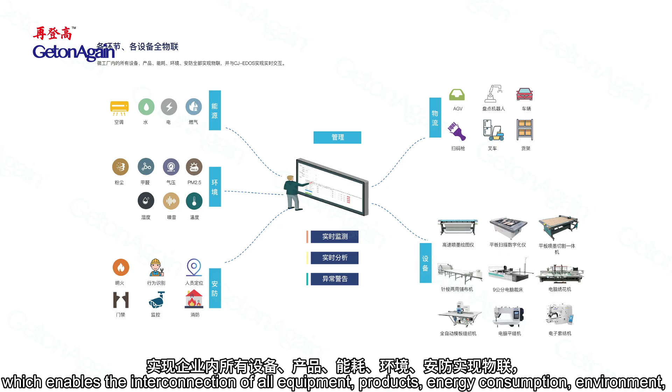Furthermore, by integrating Internet and IoT technologies, the company has developed an enterprise operating condition IoT management system, which enables the interconnection of all equipment, products, energy consumption, environment, and security within the enterprise. This system interacts seamlessly with the enterprise digital operation and management system, building a multifunctional integrated platform for enterprises, enabling functions such as data collection, real-time monitoring, data analysis, and remote management.